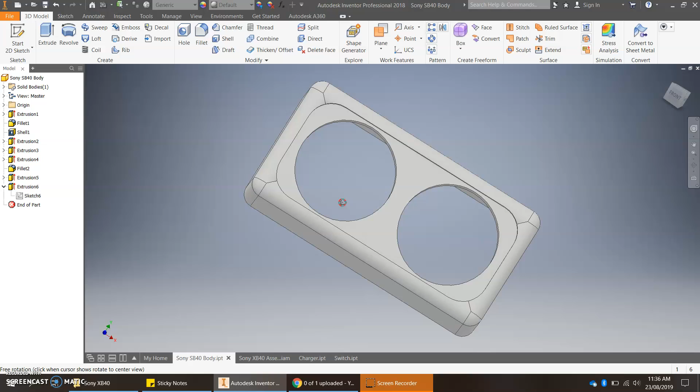Okay, now if you'd like to make the back to the Sony speaker, the first thing you need to do is go to the Inspect tool, Measure, and measure the width of the outer surface. You click on 2 points and it will give you a size, so 100 millimeters.

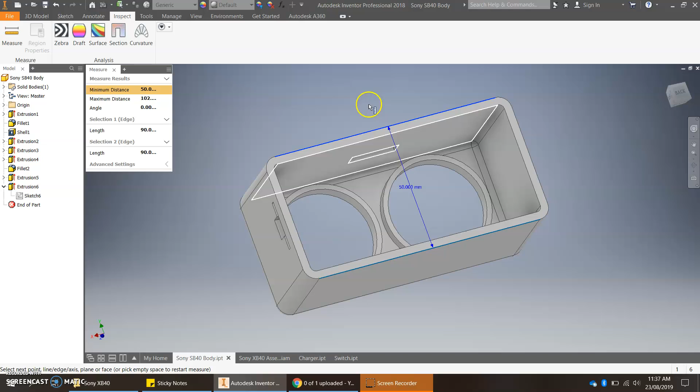Now I need to make the back 100 millimeters by 50. I'm going to start with File, New, Standard Millimeter, start Sketch, Rectangle 2-point center. I'm going to make that one 100 by, Tab key will access the other point, 50. Click Finish.

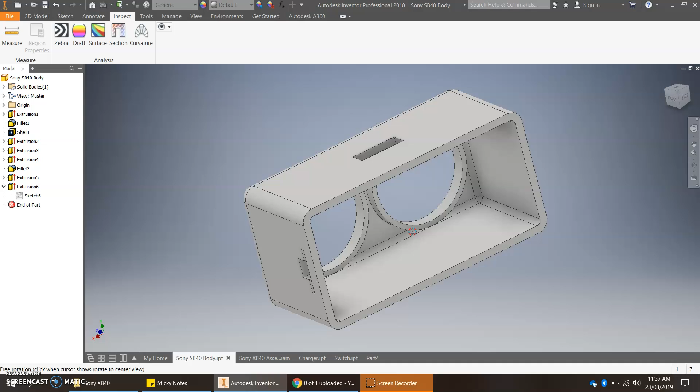Now I'm going to extrude this 5 millimeters because that's what I made my design earlier. In my last tutorial, I wanted the speaker to be 50 millimeters in depth, so this is 45 from here to the front.

Now I want it to match the front, so I'm going to measure the radius of this curvature. It's a 5 millimeter radius. So now I'm going to go fillet here, I'll do 5 millimeters, and I'm going to do it to all sides.

Alright, at this point now we're going to create a sketch on the inner surface here. Now what I want to do is basically mimic the internal shape here.

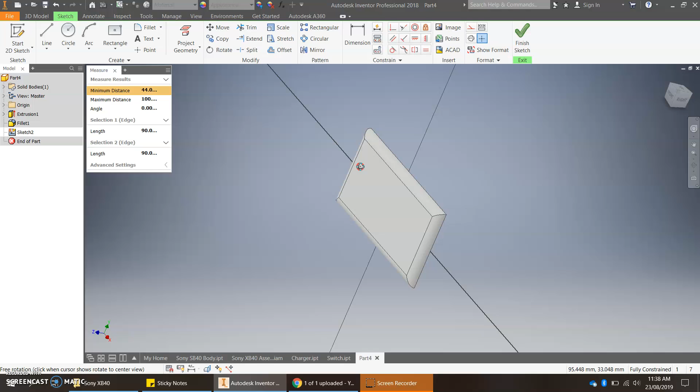So let's go measure. I'm going to pick these two inner surfaces, which is 94 by 44. Let me just check this worked out. 94 by 44, let's have a look.

So I need to add this curve too on this one. But before we do that, let me finish my sketch. I'm going to delete my sketch out actually. I think I need to click on a fillet, and I need to fillet this edge. There you go.

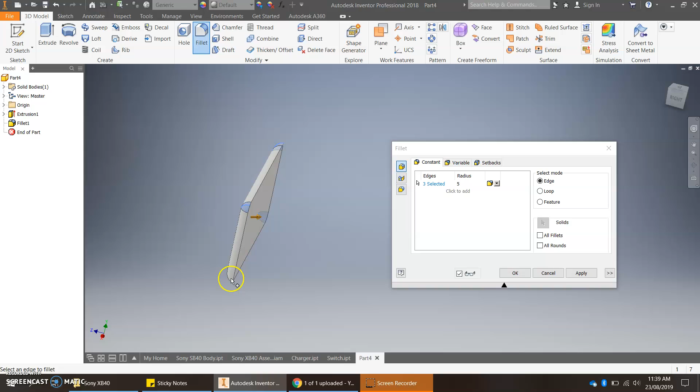Now that looks better. So I'm going to create a sketch here. Okay, and I want it to be 94 millimeters by 44. So one thing I can do first is click on the Project Geometry tool. I select the inner surface in here once, and now you see it goes yellow.

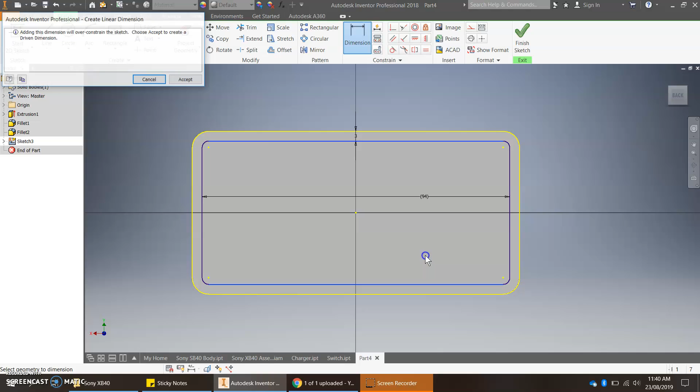If I use my Offset tool, I click on the yellow line and move in. Remember I made my shell 3 millimeters, so I'm going to click and type 3, enter. If I use my dimension tool, you'll see it will be 94 by 44. Now click Finish.

Extrude, select the inner surface. I'm going to make it pop in 3 millimeters. See now this piece here should fit in very nicely to my other component.

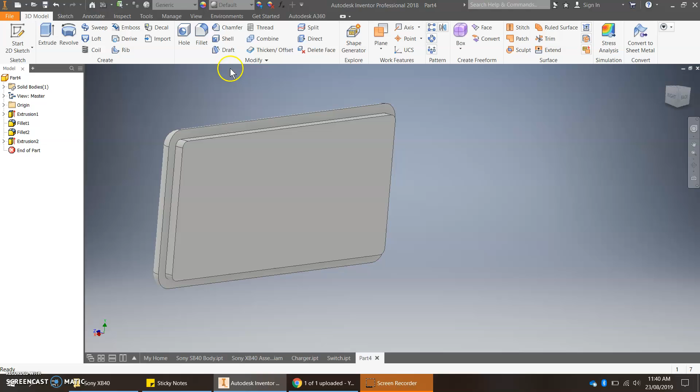Now if you want to reduce the amount of plastic you use, you could shell or hollow out the inside of this. I'd suggest 3 millimeters once again as your thickness. You notice now it looks quite nice.

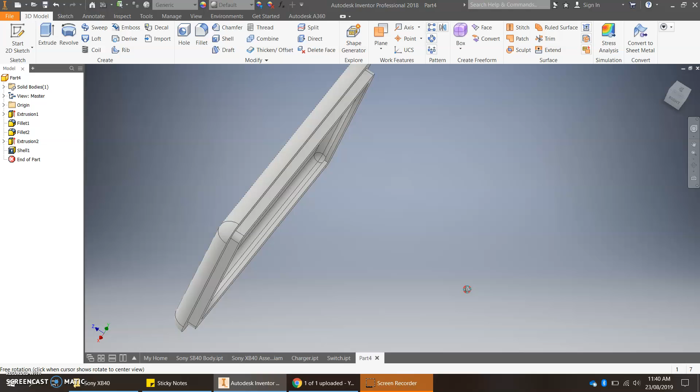Okay, at this point I'm going to click my Save tool and I'm going to save it into my work. Sony XB40 back.

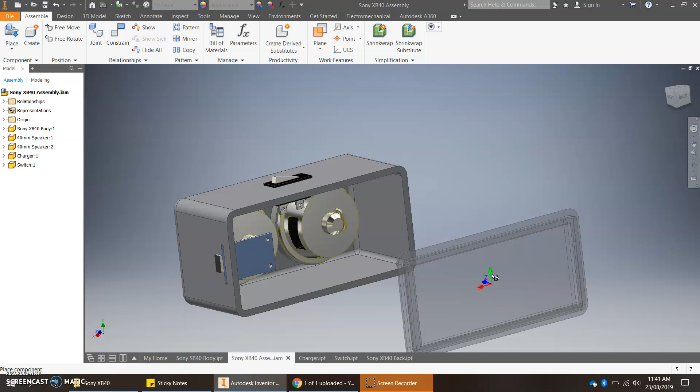I'm going to go into my assembly. I'm going to place my back open into my assembly. You can see it's facing the wrong direction, so I'm going to use my rotate tool, free rotate. Click on my item and get it into its close position. It's a bit twitchy.

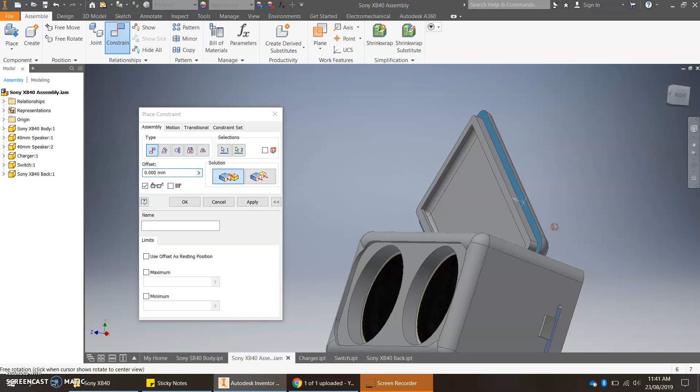Constrain. I'm going to select this surface here and this surface, and you'll see they're now lined up in place. Click OK.

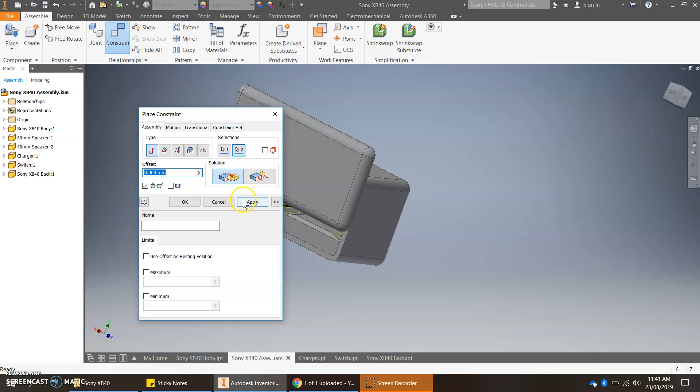Next, I'm going to use my constrain tool. I'm going to select this surface here with this inner surface here. Now it's looking more lined up. Click apply. Pick this surface here with this surface here and click OK.

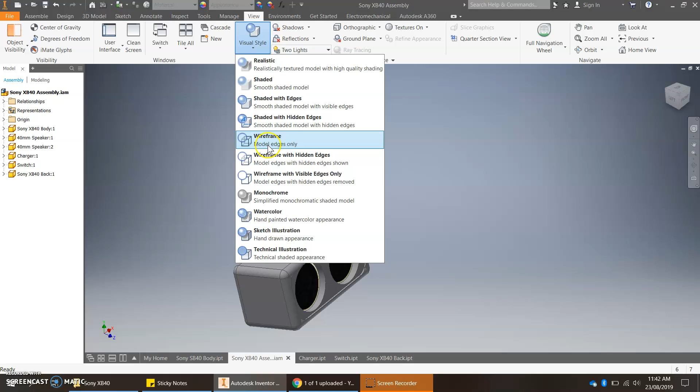Now you see I've got a perfect design. I'll just show you view, visual style, wireframe with hidden edges. You can see this is where it's going to all go together.

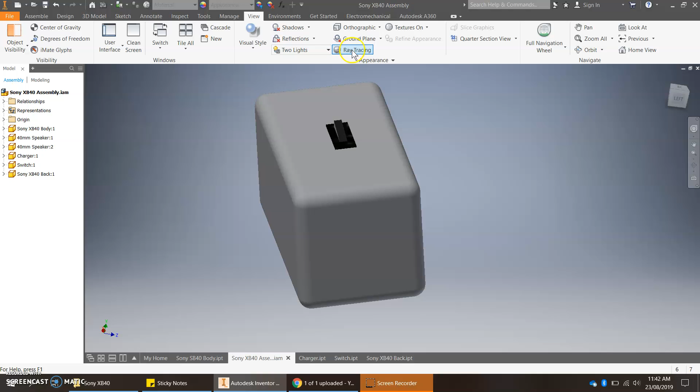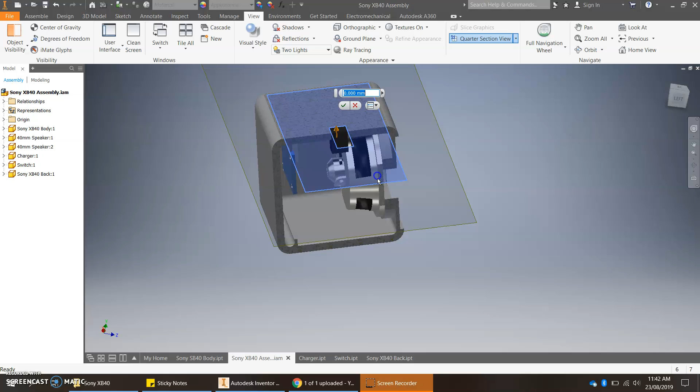One other way you can actually look at your work, you can go view, should be a slice quarter section view. So if I click on that, I just drag it in. See here, if I click OK, this kind of shows me a little bit of a layout to see how it's all going to fit together. It's very interesting.

Okay, that's the tutorial.